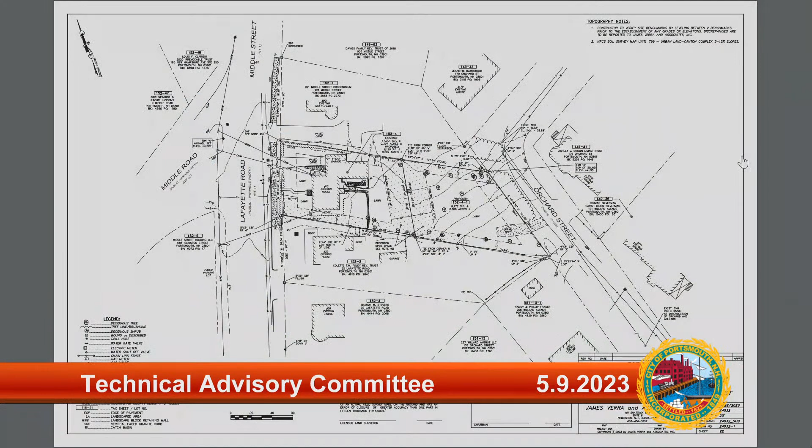Oh, it is? The house in the diagram there at the top of the sheet, right next to that is a gigantic outcropping of ledge. Oh. So the hill is there for a reason. But it's not undevelopable. It just needs some utility infrastructure that's not there yet. As for the contribution to pay for the utility infrastructure, probably at the time a building permit is pulled for the lot.

And then the water will be available when? We will put in a water service if we have a valid lot of record by the time we do the project. We would drop a water service in for them, and then when they go to connect, they would pay for that service.

So is it fair to say this lot should not be developed until that Willard Street project is near completion? Otherwise, there won't be any utility connections. There is a water main connection in front of that house to the right of the lot, number 179. But if they jump ahead of the city project, they would have to run their own private water line down the street.

Where's 179? Sorry. It's on Orchard, on top of the street. Nick, look up. 176, is it? Looking here, it's the same thing. I have a question. So the water service that's shown in this plan right here does not exist. It doesn't exist. There's no water line at the turn; it ends.

Okay. That was taken from the base plan that was provided to CMA Engineers. So I don't know where that data came from, because our firm did the survey for CMA. Yeah, there's no water line there. It was on the plans to CMA. Okay, I don't doubt you. Is CMA doing the project? CMA's doing the project, so maybe they used design plans instead of actual. Maybe they gave you a bad layer, I don't know. There's no water there. We'll remove that then. Thank you.

Because the other house that's shown down below, they have water, I think, off Willard. 176 would come off of Orchard, just in front of their house, or off Willard? 171 would come off of Willard, same with 205, the two at the bottom of the sheet. And it will, or it does now? We believe they come off there now. Okay.

So is it fair to say, prior to construction on this newly created lot, the Public Works Department would review and approve utility connections, including connection to the stormwater system, any contribution agreement, and driveway location prior to construction? Something like that, yeah. Anything missing? I don't think so. We weren't planning on bringing the stormwater connection that far up the street because the lot didn't exist at the time the 60% drawings were done. It's possible, but the applicant's going to be responsible for the cost of the extension.

Is it fair to say the contribution agreements for the Willard Street project, if that's what it's called? Willard Ave project. And any required modifications to it, such as the one you just laid out. Just want to be clear to the buyer. I can reread that at some point. It's just a TAC work session, so that's what's coming when you come back to TAC. Is that something you would like to see on the plan? I think it'll be a stipulation, but a note would be great on that plan for the buyer. Okay. If you want to reach out, I can give you more or less what I said. Perfect. Thank you.

Anything else on this? When does addressing come up? As soon as it's subdivided, is it assigned an address? The applicant should reach out to assessing and get a preliminary address and map lot number and have that on your preliminary plans as it goes through the formal TAC process. Once it's approved by the planning board, assessing will start getting it into the system so that when it's filed at the registry, everything's good to go. Presumably it's going to have an Orchard Street address.

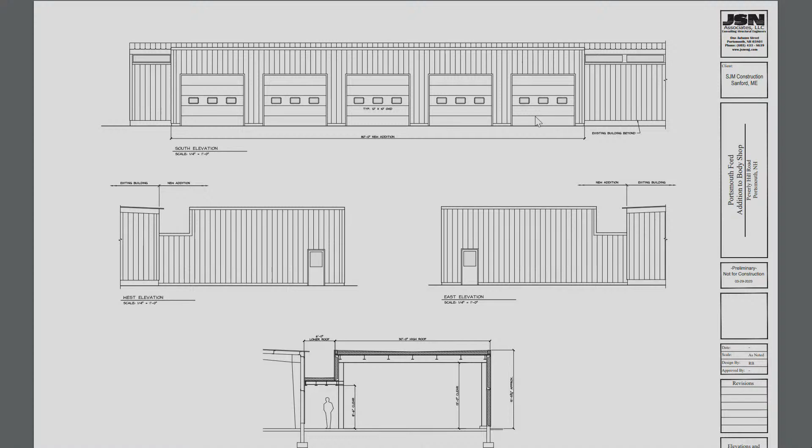And the middle section is the view of the addition, right and left. The addition is towards the middle on each side. So the existing roof slopes toward where the addition is going, and there's also high bay windows. So the design team put in a lower connector. That's why it drops? For windows? That's why it drops, yeah, for windows and also to get the rainwater off of that other roof. And then you've got the massing of the bay. So there'd be a car lift in there, and then connection between the old building and the new.

If you want to go to the next, so there's a preliminary set. This survey plan is from the survey that was done previously by Easterly, used with permission. You've got the building that fronts along Peverly Hill on the right, and that is part of the operation. There's a standalone building to the left, which is all comprised of Portsmouth Auto Body Center, and the building to the left in the back is where the addition is going. The next sheet shows you some existing temporary structures that will be removed, and it shows notes about demolition.

The next sheet shows the building expansion, so it has no problem with setbacks, 180 from the front, 62 from the side. It is jogged a little bit from the corner to reflect the maintenance of that catch basin that's off the south corner of the existing building. There's also a gas line that services the building; the addition is stopped before that existing gas entrance. The gas line location is from an older plan, so it's kind of close to the addition. Obviously, that would be remapped, and if it has to be moved, it would be moved. That demo plan also shows pavement cutting.

And the storm drain goes out to West Road and then ties into our system? No, the storm drains drain into the back of the lot on the westerly end. Oh. So what's this dashed drain line coming in on the sheet from the northeast? Which sheet? C1. C4 has it. C3 has it. They all have a 10-foot wide drainage easement that shows a drain line, 12-inch. Is that someone else's drainage system going through? 12-inch PVC.

Do you guys know what that is? Oh, I see that. So it looks like it's taking some drainage from the intersection of West and Peverly Hill and running it through the site. Okay. And then it does say there's a 10-foot drainage easement for that. And then it all exits out the back. Is that DPW? Yeah, the city, that goes behind DPW, into that huge drainage basin back there, or pond? No, it's a smaller one.

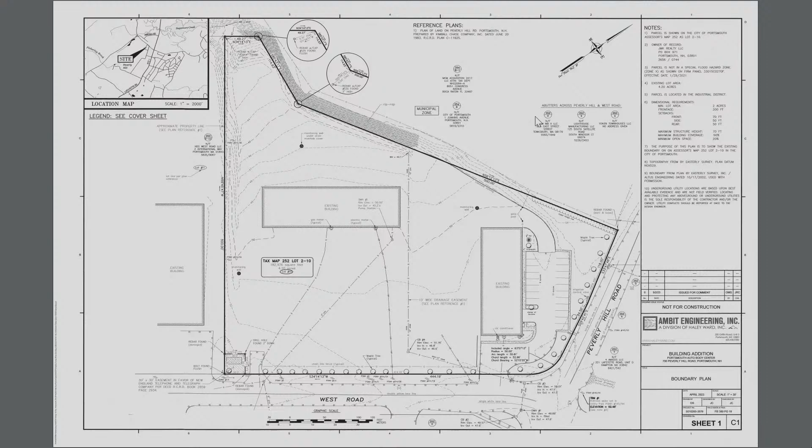It gets deposited into an area that used to be a detention pond for this building that's so grown in that it's dysfunctional. And then it goes into a culvert under the corner of the DPW lot and then pops back out where the stormwater ponds got constructed. So we'd like to see that area cleaned up. Yeah, we'd like to see the storm drainage system well mapped out and detailed on this plan, so we know where everything's going.

And then where you're putting the new pavement in, are you replacing the storm drain that's there? No, no storm drain replacement. You're just going to repave around it? Regrade and repave. So the only connection into the stormwater would be that roof drain into the catch basin on the side of the garage, which is there now, I believe, right? Yes, it is there now, but the general area needs to be cleaned up. There's some invasive species back there that should be cleaned out.

It's just a typical story, the detention pond did not get maintained at all, it just got abandoned. An orphaned detention pond, full of trash and everything else, and needs some upgrades. But I'd like to see the survey complete, so we know exactly where the outfalls are, what the elevations are, what the contours are, so we can see that everything's functional and working. And if it is, I think we're good. If it isn't, there might be additional considerations.

Yeah, if you go to the next plan or the 2 plans down. But you're adding, what, 80 square feet? We're adding back less pavement, so making the strip on the right side of the addition wider, so it doesn't change the impervious surface on the entirety of the lot, which is quite high because it has been gravel and then it was paved under a permit.

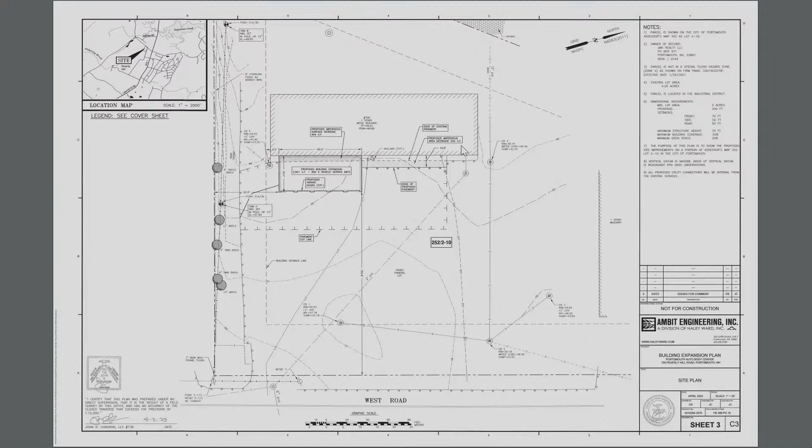Well, no, you've already done it, and I'll say what's obvious, maybe not to the parking people, but more is more. I don't know if it's a 1-to-1 or what your ratio was of replacement for displacement, but the more open space, more non-impervious surface you can put out there, the better for drainage. So I'd encourage you to go as far as your client will let you go, rather than just a 1-to-1. Yep, okay.

Do you know what the open space is now? I don't see it on here. Let's see if it was calced for the, well, we know it's not 20. Yeah, but I just want to check if we're going to look at non-conforming. The previous plan said it was 22.5%. It must have been because of the stuff in the front. Because there's an open space in the front. Yeah, that counts. So this is 22 and a half, you said? That's what it says on this plan.

Is that in the boundary plan? That's a different plan. We don't have that plan. Well, it's in your record somewhere. That was approved. I didn't go look at the records. 22-ish. Oh, and you got all this over here, right? All this over here is also paved, I guess. That's what was counted before, yes. Yeah, so looks like it's conforming, if that's correct. Okay. That's good? All right.

So we're going to come next month? No. The drainage needs a little work. I'll probably meet you out there, David. Yeah, the drainage will need a little work.